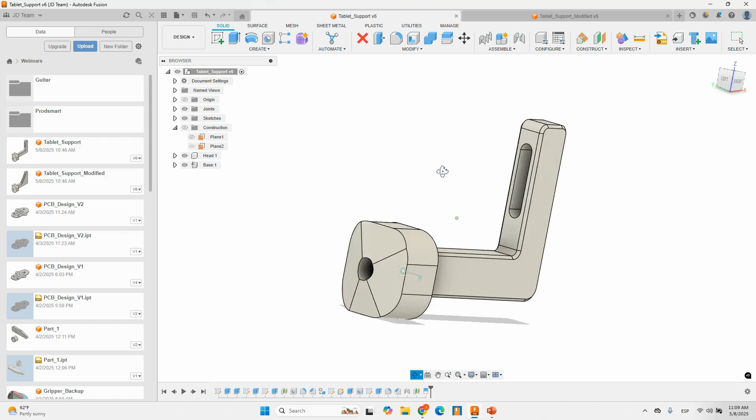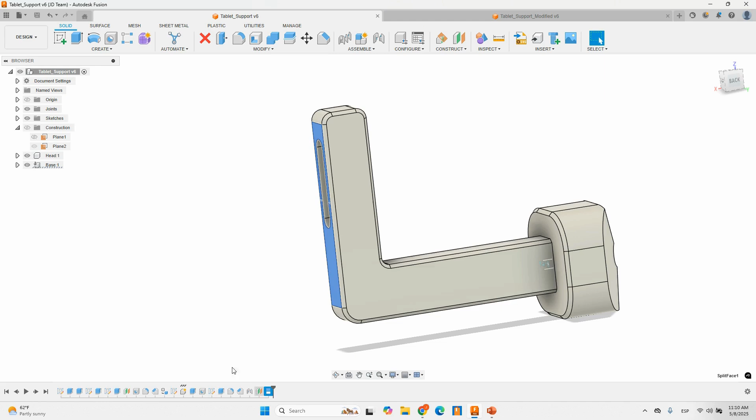So we're gonna start with this. This is a little model that I created for this webinar. I'm gonna go in here. On this one, I'm basically just defining a couple components. I have everything integrated in one single design, right? Tablet support, close this one. I got the components, the head, I got base, right? And whoops, I'm gonna place it like this. There we go. I'm gonna show what this is supposed to do, right?

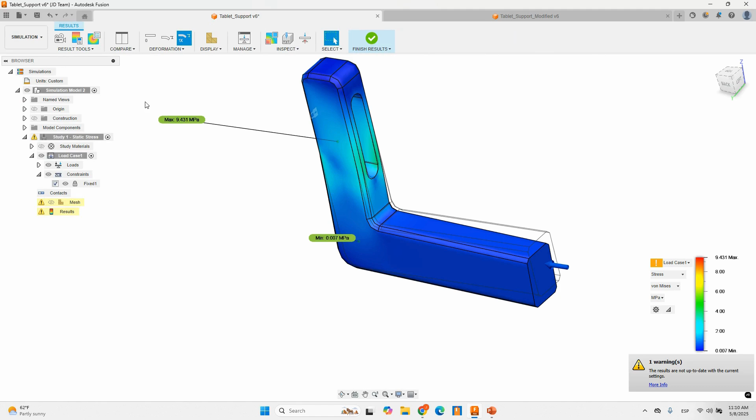So I got my assembly, I got my constraints in here, but in this case, what I need to simulate is just the base, right? So I can access all of the workflow tools right here on the left. I'm gonna send that to simulation, right? So I'm gonna create a new simulation for this one. New simulation study, static stress. There we go, right?

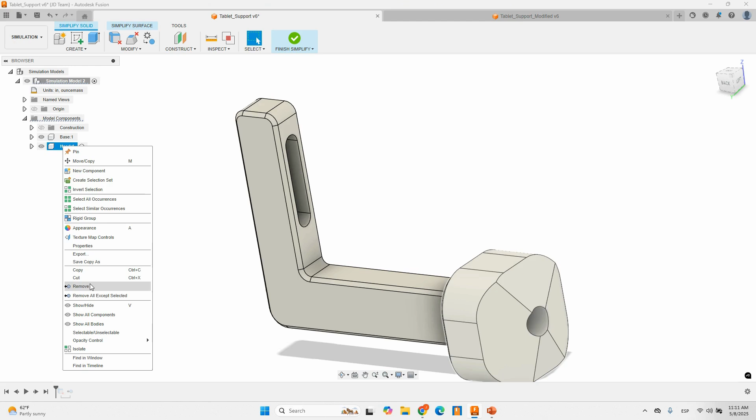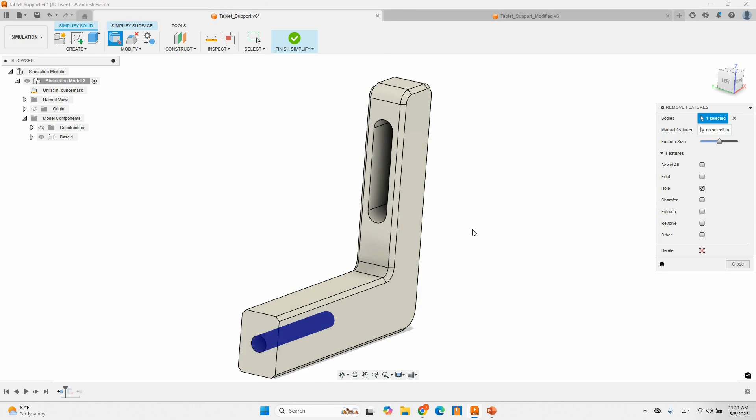And just so we're aware of what's being done here in terms of the simplification of the model, it's this. I got my base, I got my head. I'm not gonna need my head, right? So I'm gonna go ahead and remove it, and I'm gonna get rid of all the geometry that I don't need for my model. In this case, I wanna focus. I'm thinking that this is gonna be the part where I'm gonna get most in trouble, right? So I'm gonna simplify my base part by deleting the hole. There we go. Okay. Go back here. So I already had it.

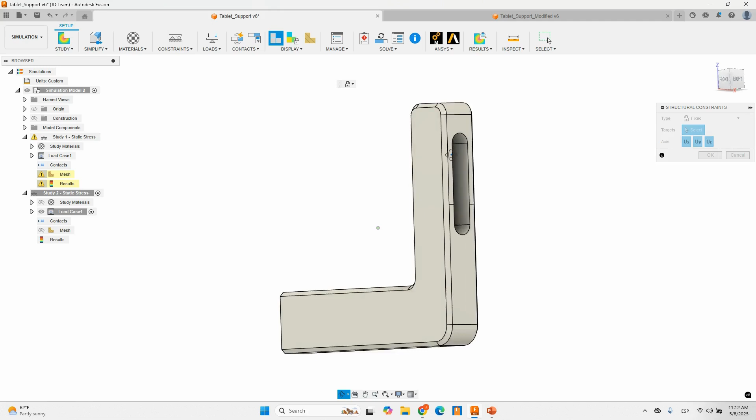Okay. And with Fusion, it's very, very simple to apply my constraints, to apply my materials. I'm just going to check that my material is set to ABS plastic. If I want to run different scenarios on materials or loads, I can do that as well. But we're going to keep it simple just to showcase the workflow, right? I'm going to specify a constraint here for my face. I deliberately created a split in this face, right? Because I'm assuming that the wall that I'm going to place this bracket in ends right here. So this is going to be the end location of it, and that's where my part is going to bend.

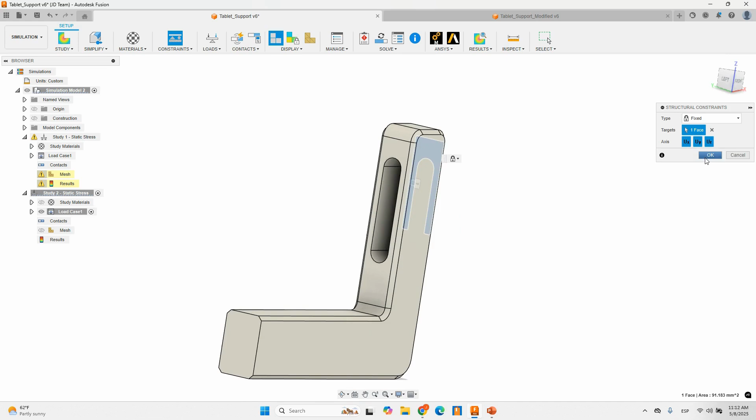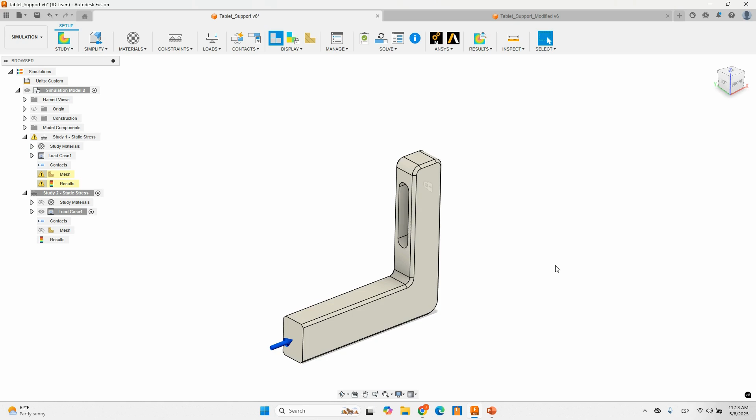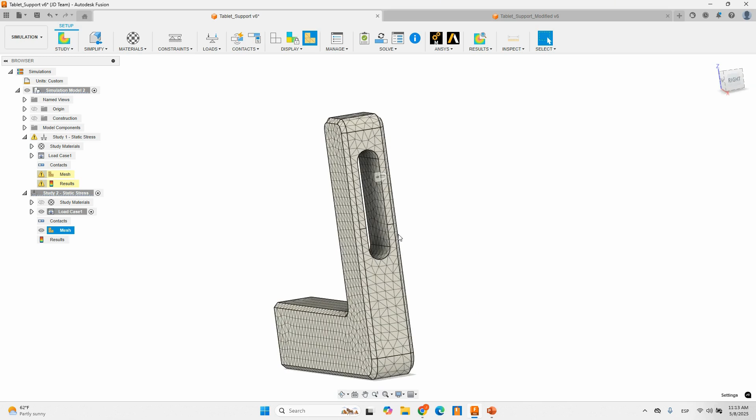Right? I'm going to establish a load. I'm going to place it right here. This should be around 20 newtons for approximately 2 kilograms, just to make sure that it can withstand even pushing the tablet, something like that. Okay. Now all we gotta do is define the mesh. Gonna compute the mesh. It's a bit coarse, but can make it work, I guess. Just gonna check that the design is ready for simulation, and I can go ahead and solve my design. Right? It would take a little while, so I'm just gonna wait for a little bit.

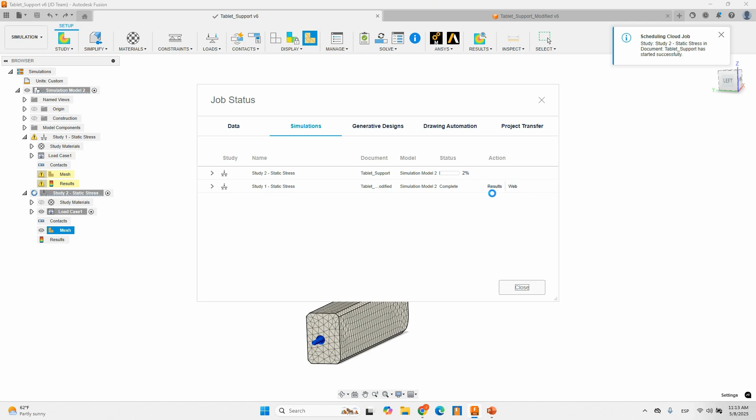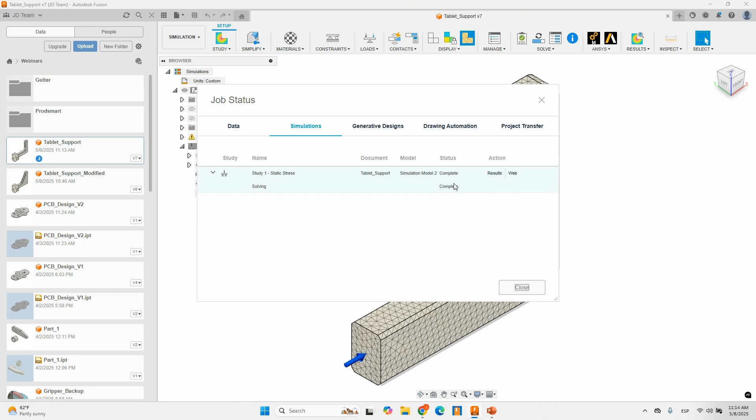And this is all right. Close this one. Oops. Static stress, and there we go. Pretty quick, right? I'm looking at this one right here. Depending on the complexity of the model, it might take some more or less time, of course. In this case, this is a static study with the mesh.

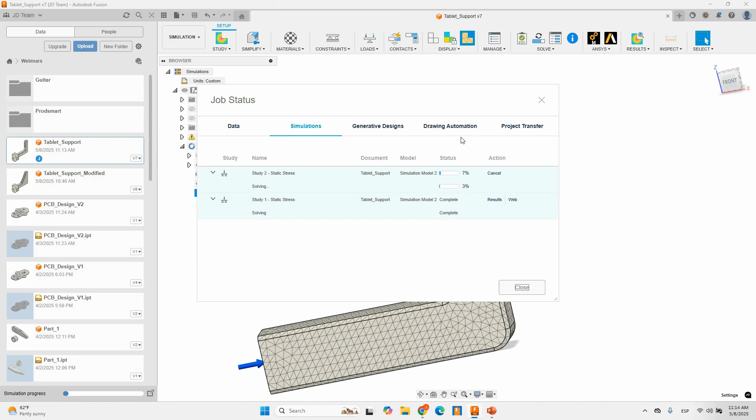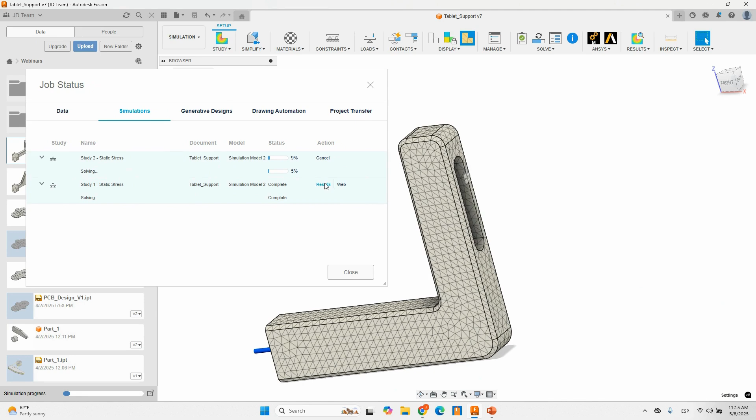Of course, if you're familiar with simulation terminology, we would need to make a mesh independence study. That is refining the mesh around the areas where you have more stress. Make some checks, some validations as well, right? But eventually you would get the results that you want. Okay, I'm gonna jump to results that I get for my model right here, just because this is taking some time.

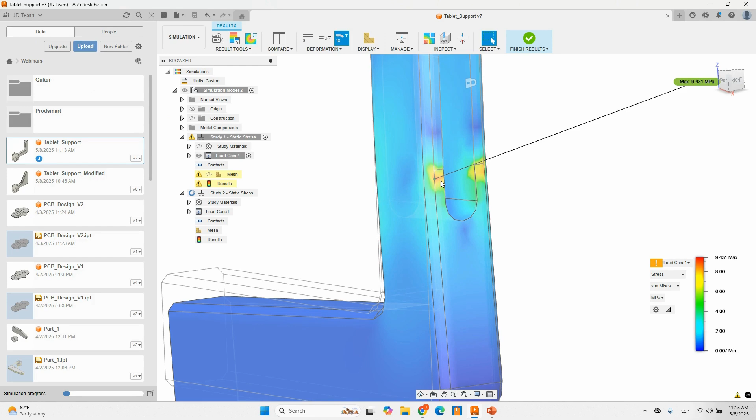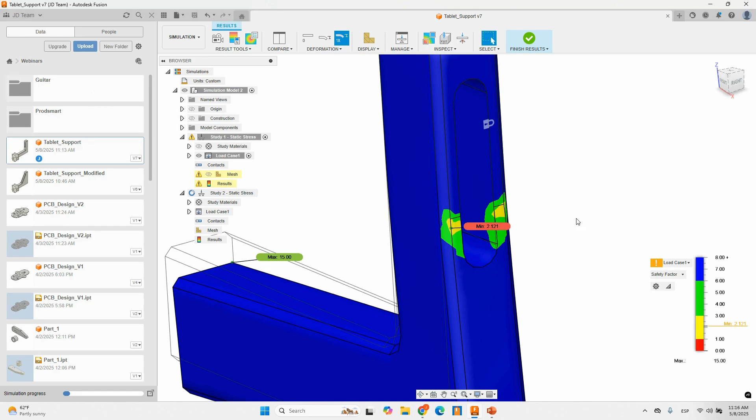And in this case, what I can find here is that as expected, what we get right here is a high stress area. Okay, this is probably not a good solution. I'm getting a lot of bending here. If I take a look at my safety factor, for example, I will find a safety factor of 2.121, right? And that means the component is not going to break in theory, right? But the safety factor, it's a little too small, right?

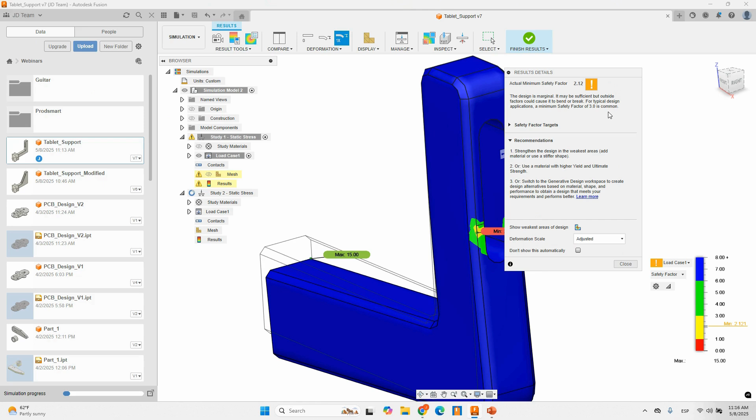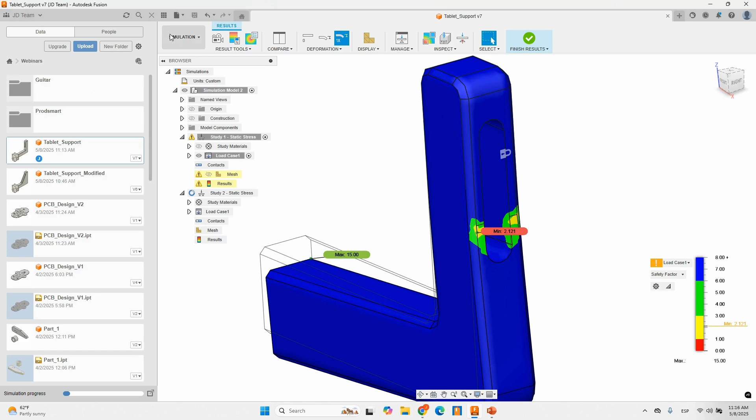You can even get suggestions from Fusion. Fusion is going to tell you that the safety factor apparently means that the part is going to withstand that force, but you want to have something above 3, just to make sure that you can withstand unexpected forces, those kind of things, okay? So probably it would be a good idea to make some modifications on this part. So that's the beauty of it. In Fusion, we don't need to resend the model, export the model again. We can work inside of the same environment and make any necessary changes, right? Real quick here, gonna cancel this one.

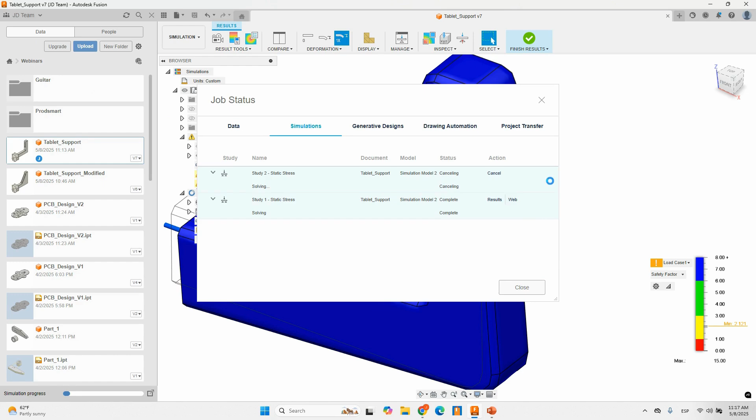There we go, finishing up my results, and while at it, I'm gonna delete this one. Now I'm gonna go back to my design and make any necessary changes.

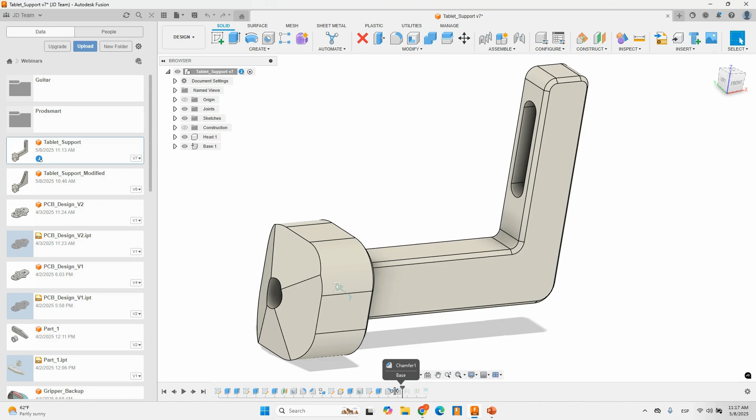So my idea here is I'm gonna add a rigidizer over here. I'm gonna back up a little bit in my design, go to my base and make any necessary changes.

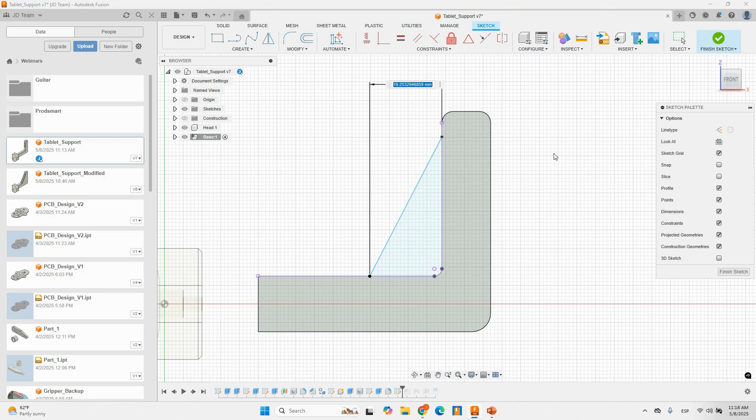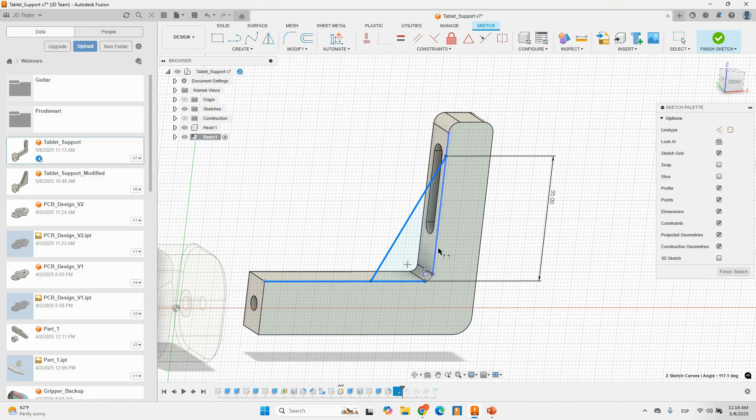And I'm gonna give it an angle of 45. That's a little too much material there, right? I'm gonna change this to 60. There we go.

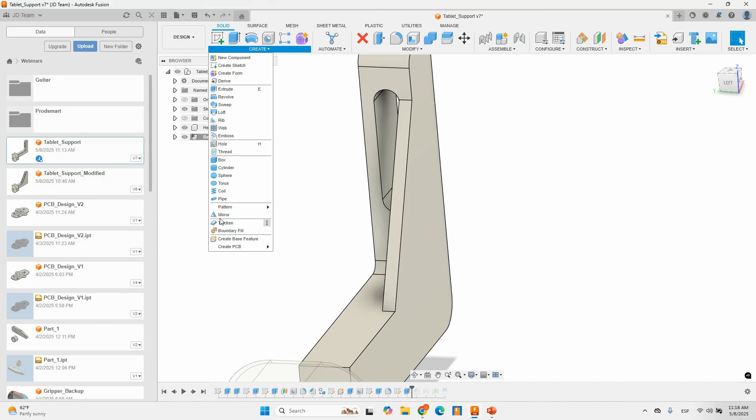Get my part there. Mirror my feature, this one right here. I'm gonna create this—it's symmetric around the origin, so I'm gonna search my origin here. XY, XZ. There we go.

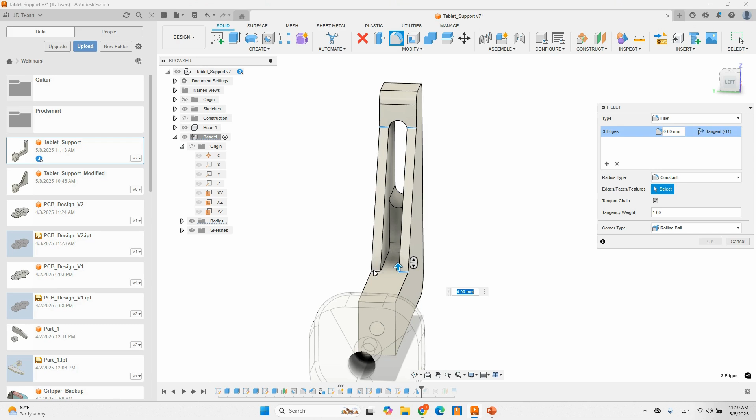This is the part that I'm gonna simulate right now. Probably if we think about what the part needs for actually working, it would involve creating a recess here, an extrusion for placing the screw or something like that. But we're gonna keep it simple—just gonna make a change so we can check on the workflow.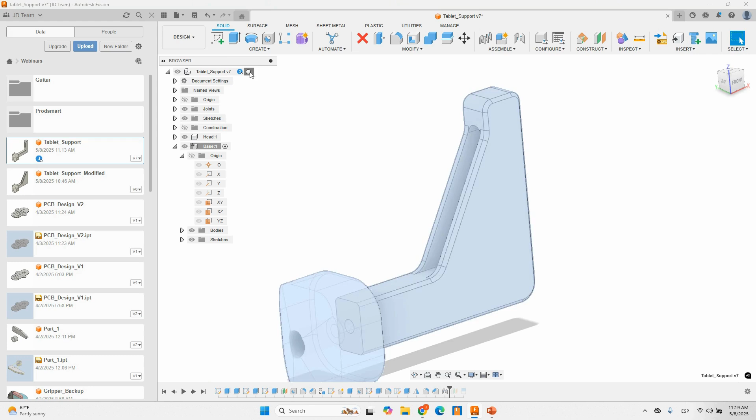So this is gonna be my new part. I'm gonna activate my support right now. I gotta define my face again, and there we go. That's my new design.

And because all of it's part of the same environment, I can just go into my simulation and everything's gonna be in place already. I don't need to create a new study, I don't need to set the loads or constraints again. All I gotta do is update what's geometry related, specifically the mesh.

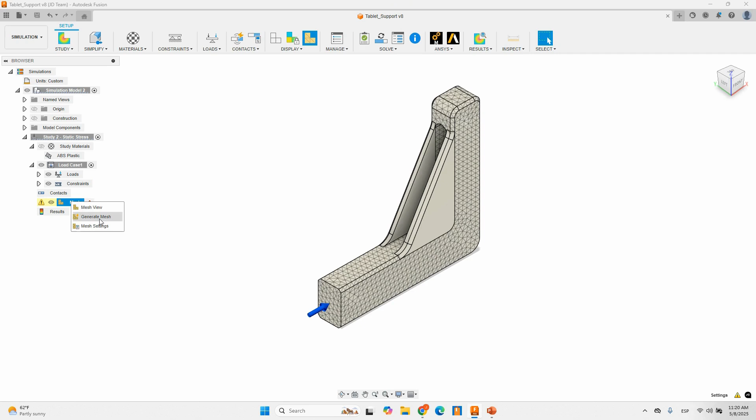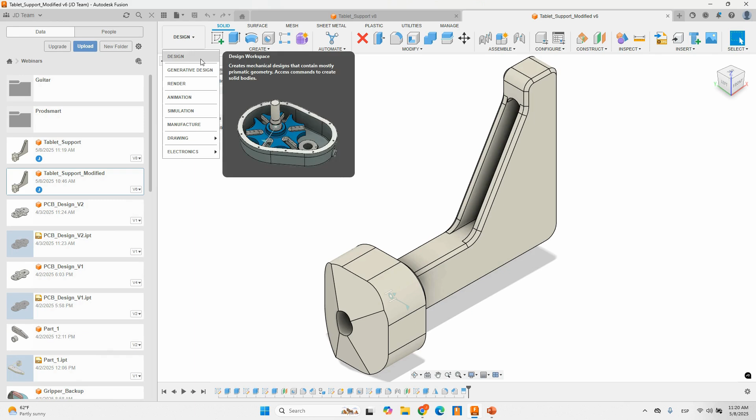All right, now all I gotta do is solve my model. In this case this is gonna take a little while, so I'm gonna open another version of this part that already has the information on the simulation, so I can check on those results.

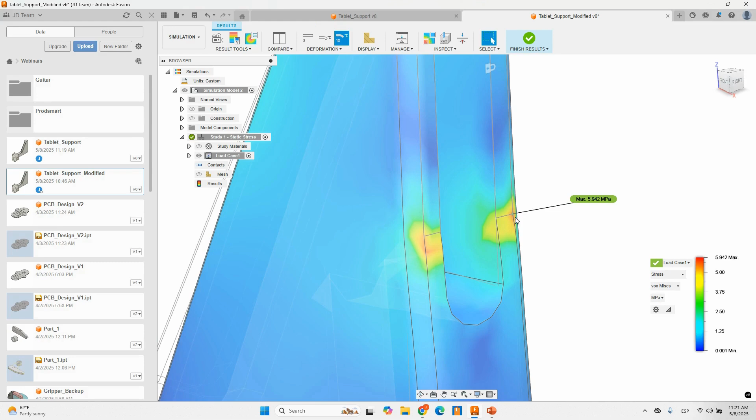And there we go, this is my new part with my simulation results. I can check the safety factor, I can check the stress for this new one. Of course the stress is still gonna be at that point, but the stress is a lot less, almost half of it.

We check on the safety factor with this model, you get a safety factor of 3.3. Basically you're good—you're over 3 for general design. This is a better design.

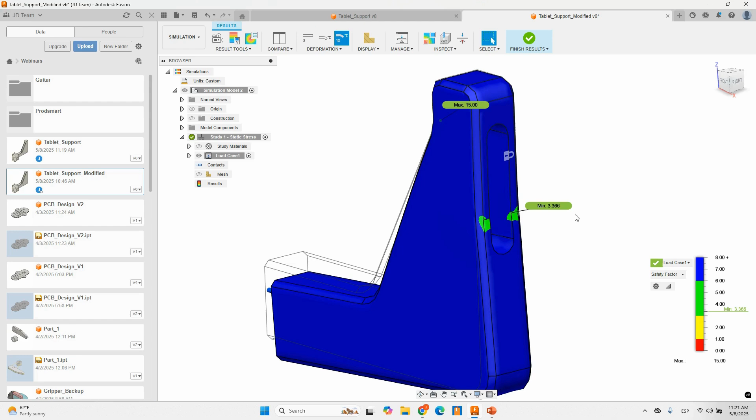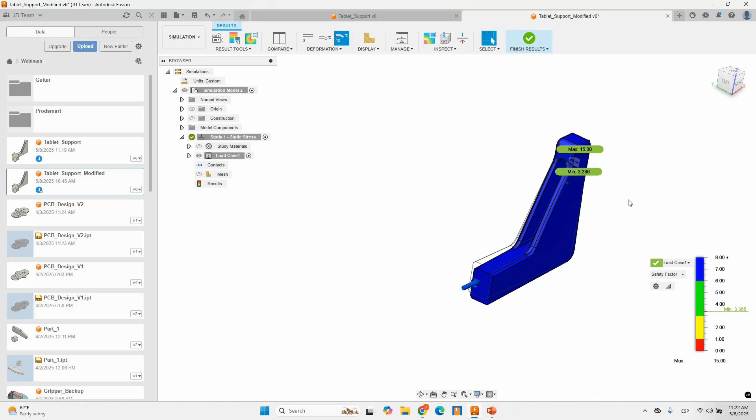So when we're talking about digital prototyping, this is where people think the whole shebang goes—basically send your model to the simulator and check on the stress, and that's it. But if you're working in an actual industrial environment, you gotta know that this is not enough. You gotta make sure everything you're simulating not only withstands the forces you can virtually apply to the model, but that you can actually manufacture this.

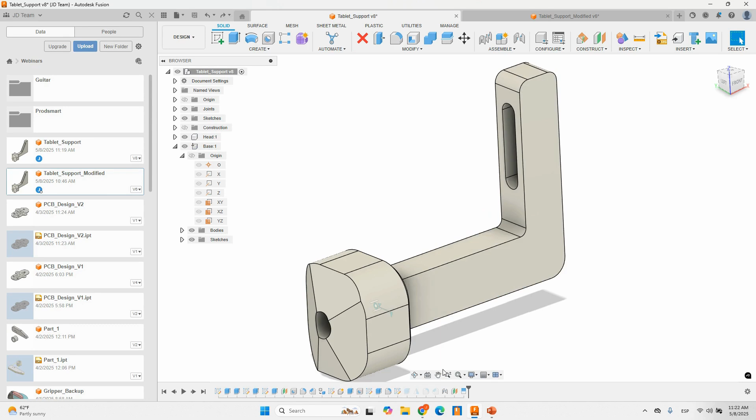And you gotta create a prototype, at least jumping from the original design, right—the one without the... let's suppress this one, suppress features. There we go, the one without the plate. So you know this is not going to work, and you know this is going to have a better chance of working in real life.

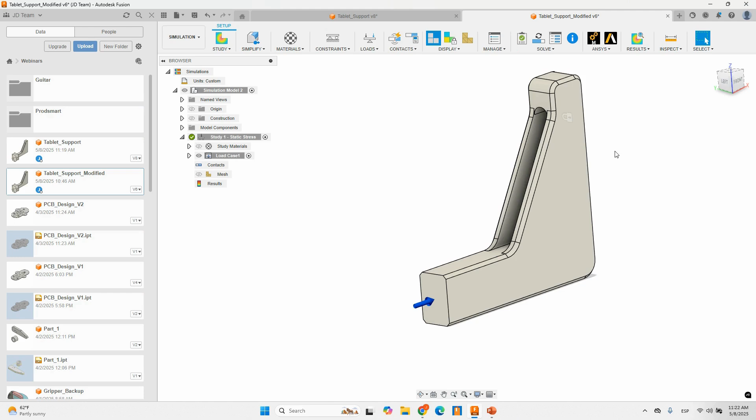But you got to test it out. That process in FEA simulation is called validation, and Fusion can help you with that—not only by specifying how you want to manufacture this, but how you can actually create the physical prototype to test it out. So you can go into your manufacturing environment. I'm gonna do this with the other one that I got right here.

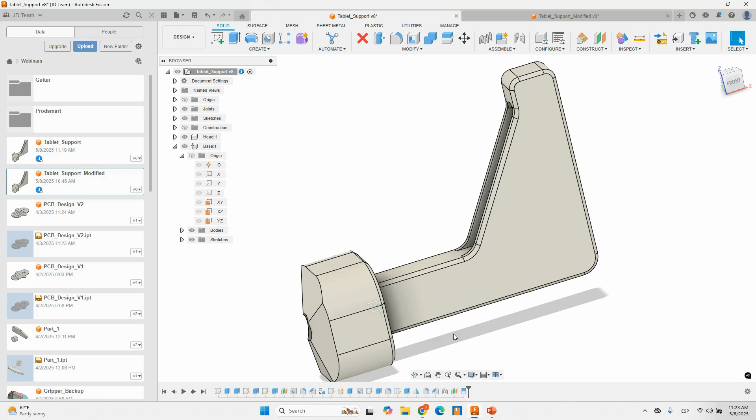And in this case, this is supposed to be an ABS bracket. So what I'm gonna do is use the most useful prototyping machine of all time for now, the greatest invention of the latest years: the 3D printing machine.

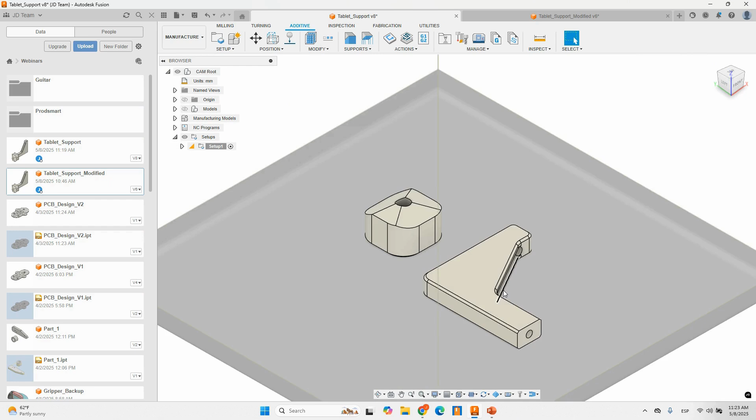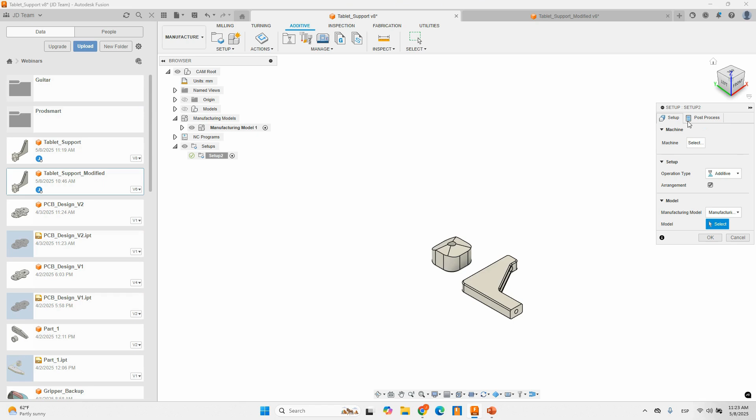On Fusion, I can set my manufacturing for 3D printing. I'm gonna send this to the manufacturing environment and create a setup from scratch. New setup, this is gonna be an additive type of manufacturing. On Fusion, you get milling, turning, cutting, additive. Any way you want to manufacture this part, you get on Fusion.

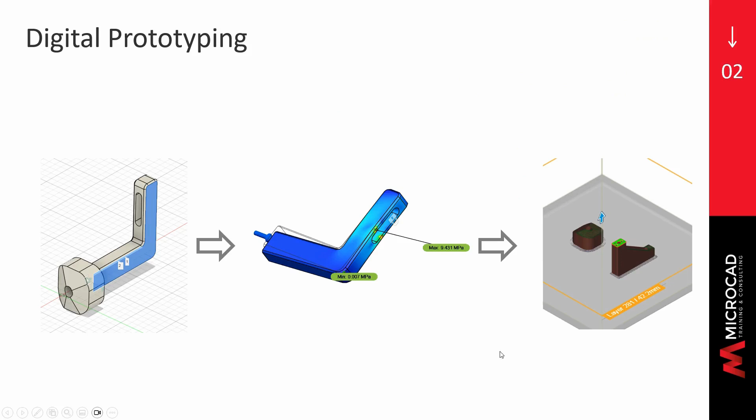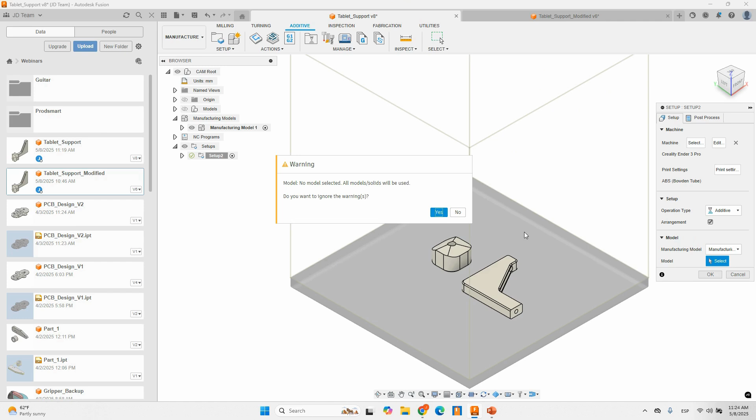I'm gonna select the machine here. I myself have the Ender 3 Pro 3D printer at home, which is basically the one that I used for printing this one, by the way. And I'm going to check on the settings for this one. This is supposed to be ABS. Manufacturing model, supposed to be this one. I'm going to manufacturing mode.

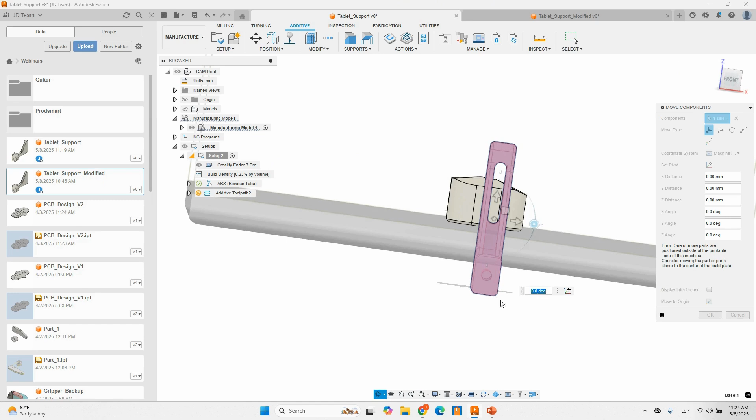I'm going to make an arrangement. All I'm going to do is set up my parts here on Fusion for 3D printing. With a little experience, you might know that on 3D printing, probably this would be the best way of orienting your model, right? But you get many tools in Fusion for making those sorts of decisions.

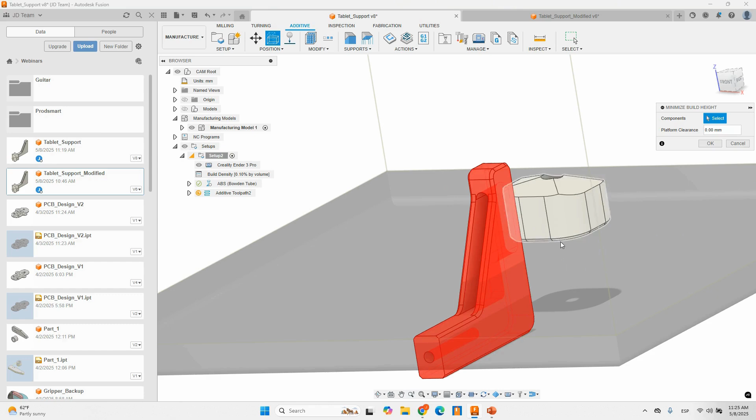See, if you want to minimize the build height, for example, that's going to be the less time that you can get for your 3D printing. Probably less time would be placing this in a horizontal way, but that will involve creating the platform, the material that's going to support the upper lid right here for my part. So that's going to be more material. Those are the kinds of decisions that you can get with 3D printing in Fusion.

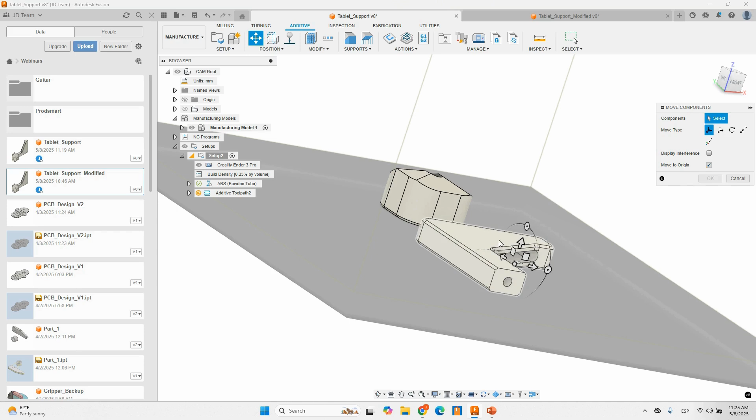In this case, I don't care a lot about time, so I care more about material. I'm going to place it like this. I'm going to set this on my platform, and I'm going to generate my path.

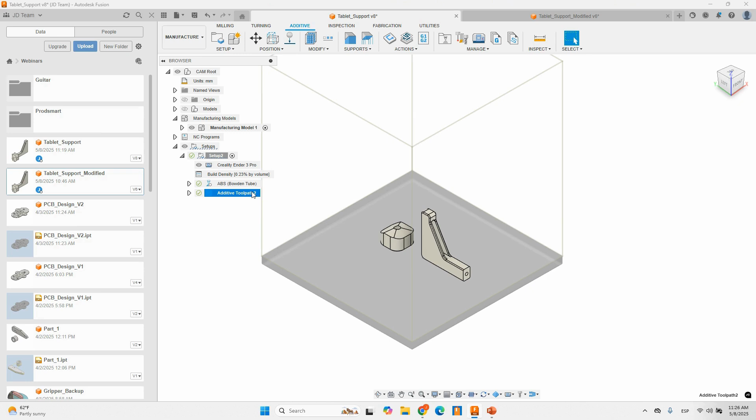So creating the manufacturing data for your model is also part of the simulation. And that means you can simulate how your manufacturing is going to go, how much time this is going to take, so you can make better decisions. For example, for this one, I got a print time of 1 hour and 44 minutes.

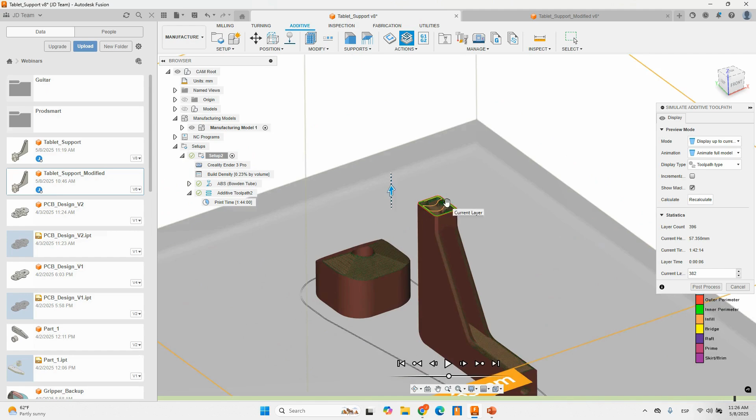And I can simulate and check how my 3D print is going to go. Just so you know, I have an infill setting, a wavy infill setting, about 20% or something like that. So this is how my print is going to go. I can make the simulation run by itself.

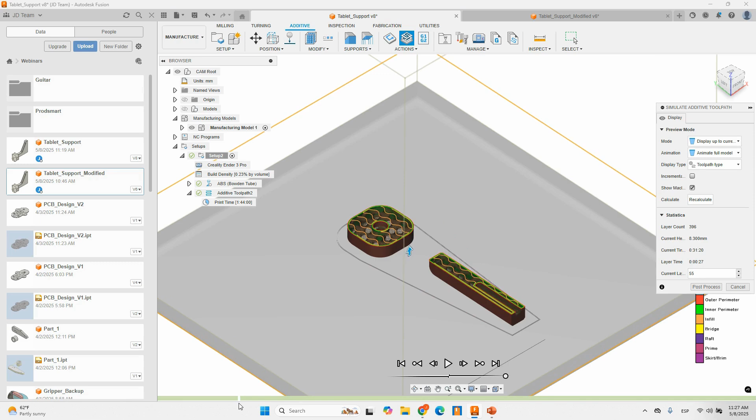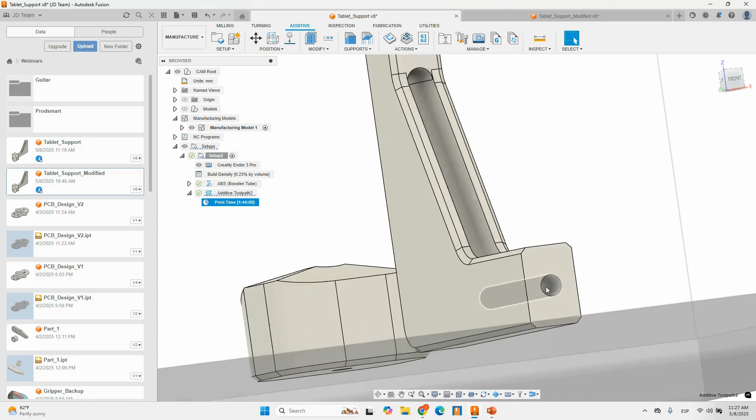Or I can just check on every single layer for my manufacturing to check how this is going to go. For example, from experience, I also know that creating this hole right here is going to give me trouble. Because for some of those features, I might not have the required material to support this region here. So I don't need to send this to the 3D printer and mess it up and say, oh shoot, I messed it up, I need to make a change. With the simulation, I can tell those kind of things and make the necessary changes in case I need it.

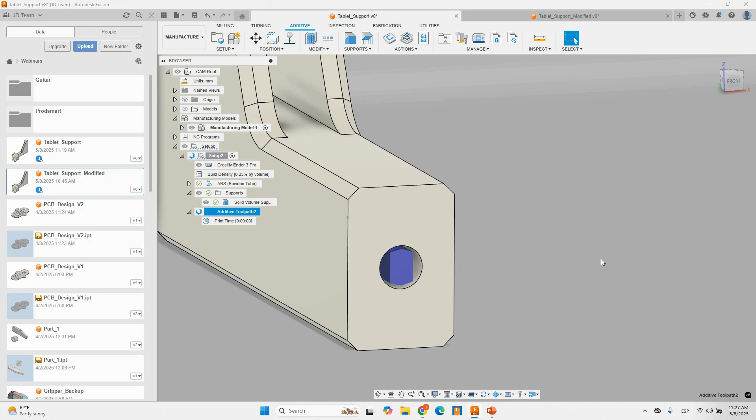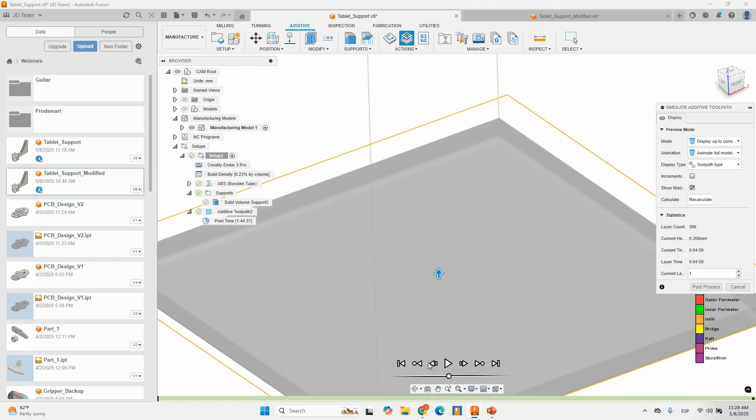There we go, I have my support there. I can generate my toolpath again. That sums up to 37 seconds, no, that's not a lot. But now I'm going to make sure that my hole is going to be created and my part's not going to collapse there. Up a little bit. There we go, my supporting part.

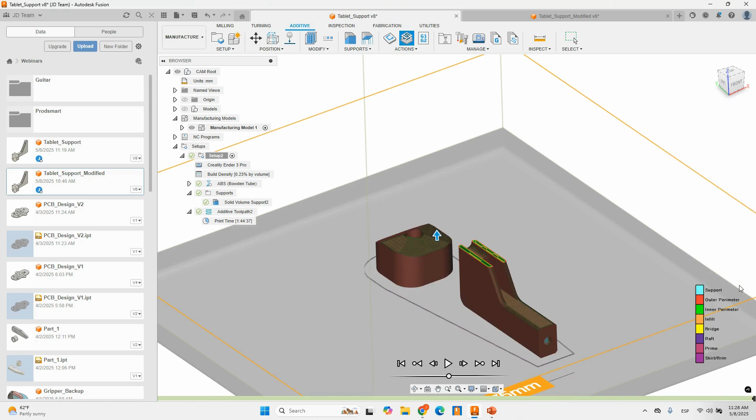So that's basically what I wanted to show today, how we can integrate the whole digital prototyping process inside of Fusion. The main points that you need to take into consideration: sending this to simulation, simulating the forces, simulating the constraints that you need for the part, simulating how this is going to be represented in real life. That's vital, and how you can make your validations with the latest tools available in industry—3D printing, advanced milling, 5-axis milling, anything you need. Everything's gonna be embedded inside of Fusion.

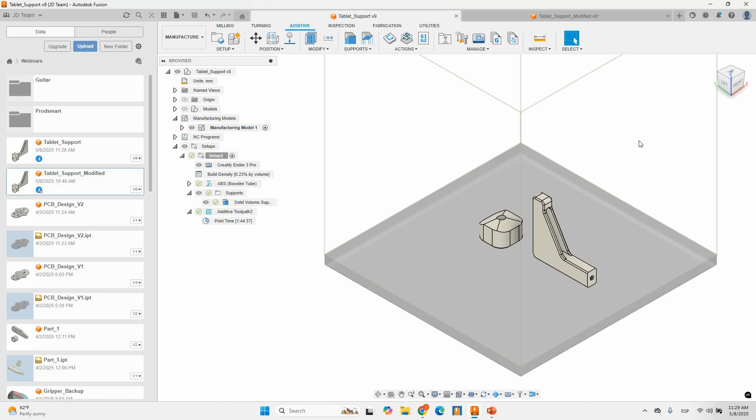And if you're familiar with the collaborative insights of Fusion, that makes sense—you know it's not like one single person needs to do this. If everyone's part of the team, everyone has access to this project, you can tell Jimmy from FEA to make the simulation. You can tell Andrew the detailer to make the drawing for this part. Send this to Andrea for manufacturing so she can create the model, 3D print it, and test it out.